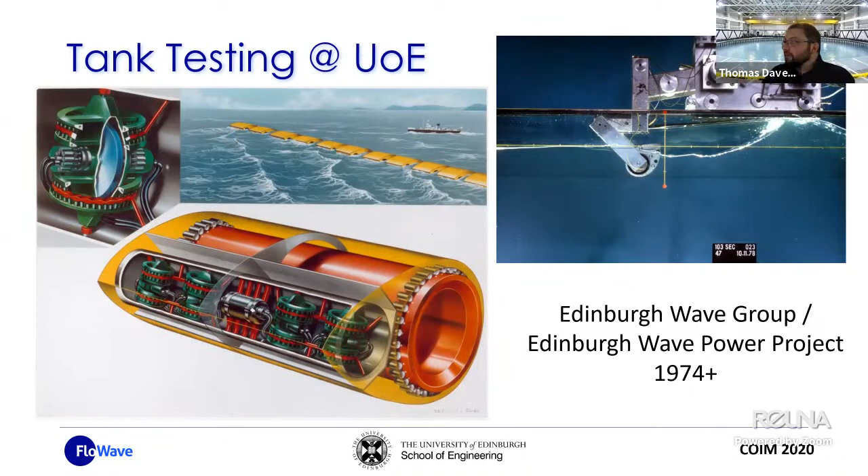But to step back even further, let's go back 40 years. This work really comes from the work that was conducted starting in around 1973, 1974 at the University of Edinburgh, by a group called the Edinburgh Wave Power Project, which was developing very large-scale wave energy devices. And this is still relevant to this day because although this device never came to commercial fruition, the technology that went alongside it fed into the development of very sophisticated wave tanks. And that's really where we come from. So you can tell that the photo on the left here goes back some time. I think this was early to mid 1980s. And this is the Edinburgh Wide Tank. So this was the first big wave tank in the University of Edinburgh.

And there was a lot of very important research conducted in this tank because it was very good at developing multi-directional sea states, so very complicated sea states. And they were testing scale models of their wave energy design concepts. The process has changed now because we don't really develop the technology ourselves. We develop the testing techniques and we develop supporting technologies. And instead of developing devices, the university and also a company called Edinburgh Designs Limited, who have connections to the university going back many years, now develop very sophisticated wave tanks.

So on the right here, you will see what is called the Edinburgh Curved Tank. And what you're seeing here is first generation and second generation. And this is a much smaller facility. The wide tank no longer exists, but this smaller facility was really exploring the concept of how you can use curved tanks and even circular tanks to basically give you much more control over wave direction.

And that takes us to where we are now, which is FloWave. So that's a fully circular wave and current tank. And to explain this in a bit more detail,

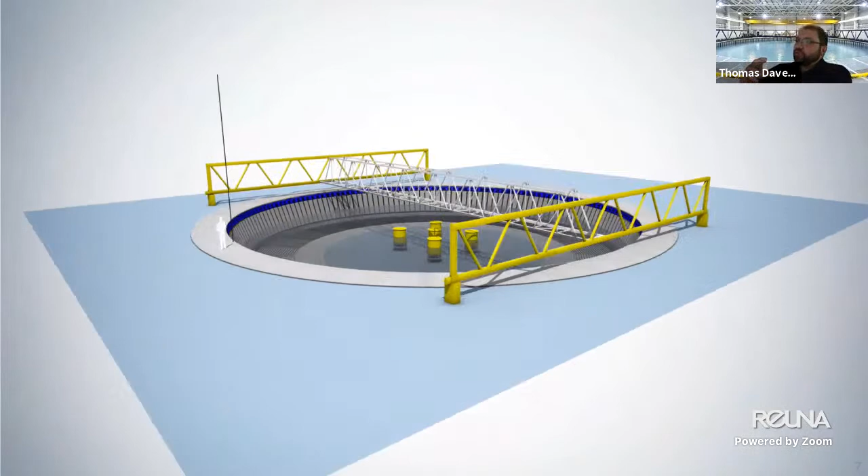But this animation is quite useful because it shows a lot of the elements which are now hidden within the tank. So if I can get a pointer. So what you have is, obviously it's a circular tank. You have these wave makers around the edge. And what it allows us to do is generate a wave from any direction. So the wave makers are the flaps. These flaps are moving. They're generating a wave. The wave travels across the tank.

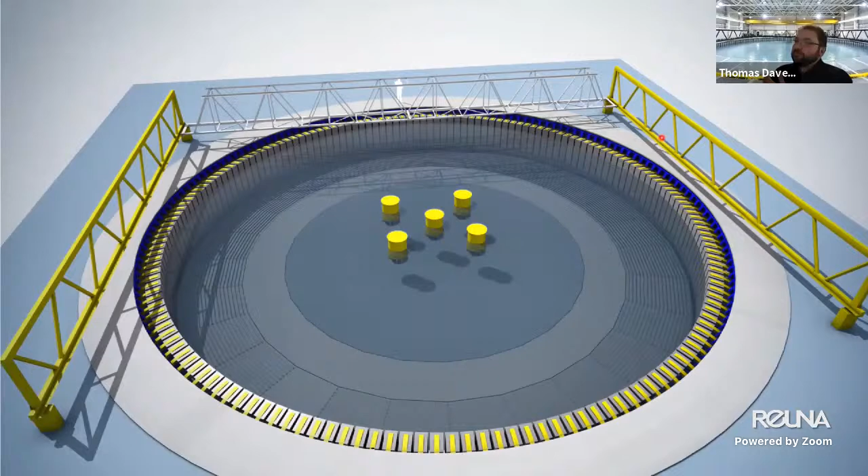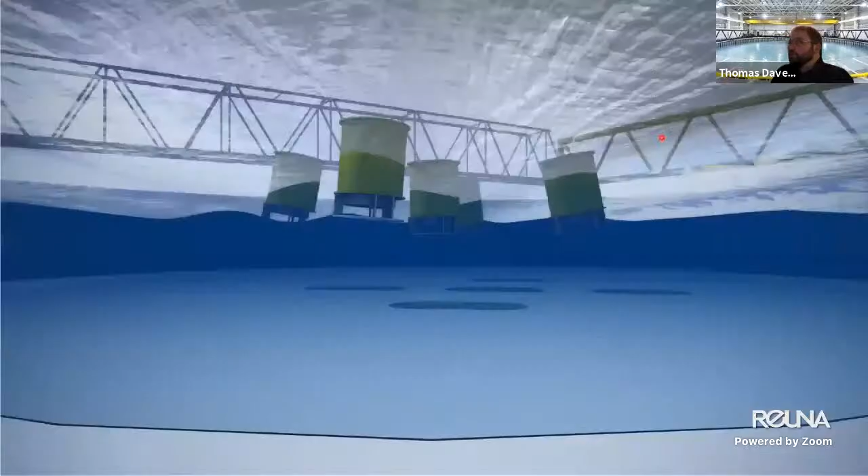But they are wave energy devices. I'm just going to get rid of this spotlight, so I think it's slowing down the video.

Okay. And importantly, we can also generate current in the tank. So wave current, and this is where the unique design of the tank becomes very important. So this is the only large circular wave and current tank in the world. So the current travels underneath the floor, so you have this recirculating effect. So you've got this bank of propellers underneath the floor, and they're arranged in a circle.

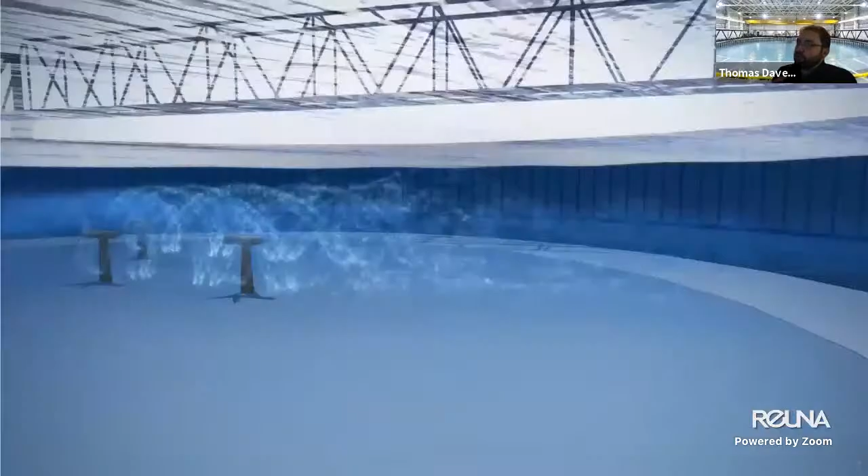So we have a circular arrangement of propellers and a circular arrangement of wave makers, and by combining them, we can generate the waves independently from the current. So we have independent control of the wave and current direction. And this is really important, first of all, for wave directionality purposes. So I'll just try getting that pointer.

And by being a circular tank, it gives us the ability to not have any restriction on modeling seas like this. So we can add wave energy coming from those different directions. And in a similar way, without getting too much into the detail, we can do the same with current direction. So you can do a lot of work with current just by having a tank which can generate that flow in two different directions. But what we can do in FloWave is start to have angled flow.

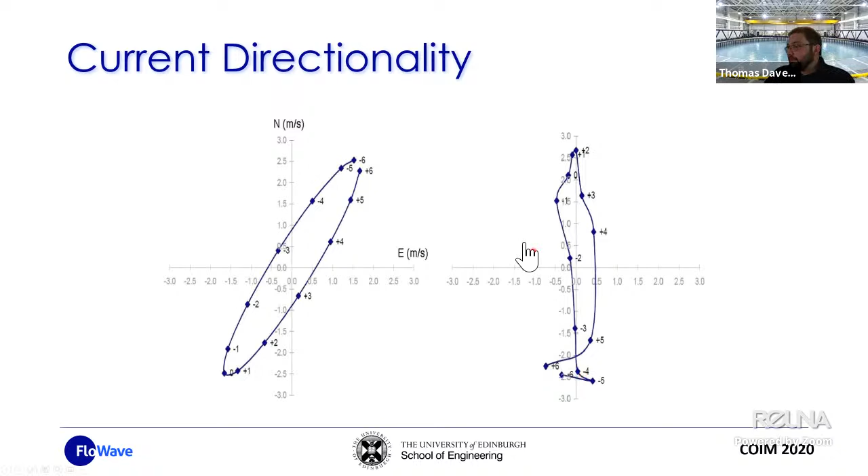And this becomes important. I don't know what the resource is like in your local areas for everyone watching, but in Scotland, we have a very fast site called the Pentland Firth, which sits between the Scottish mainland and the island of Orkney. We get very fast current velocities in here, and you can get very complex directional behavior in these sites. So, what does that look like in reality?

So the tank operating. Roman and I were joking about this earlier because the tank is very tidy. This was a video taken a long time ago.

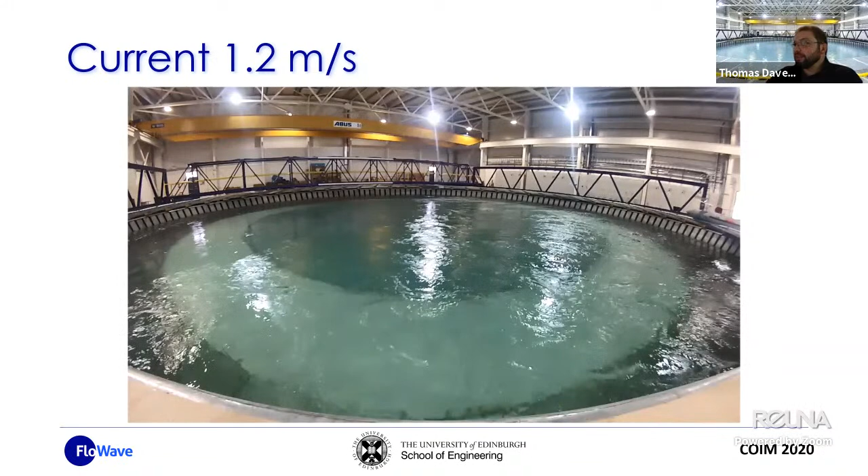Here we see the current at 1.2 meters per second. Doesn't look that fast in the video, but this is actually a very fast current velocity for a big basin like this. If you want to scale it up, this would be about 5 meters per second for a full-scale site, which represents something like the Pentland Firth, which typically is about 4 meters per second. So it's got plenty of overhead for doing very fast velocities. And then things become exciting when you put the two together.

And this is quite a dramatic example because we're dealing with quite fast current speed. But even quite low current speeds can cause quite a dramatic change in the wave behavior. And that can be very important when you're trying to feed in the conditions from a real site.

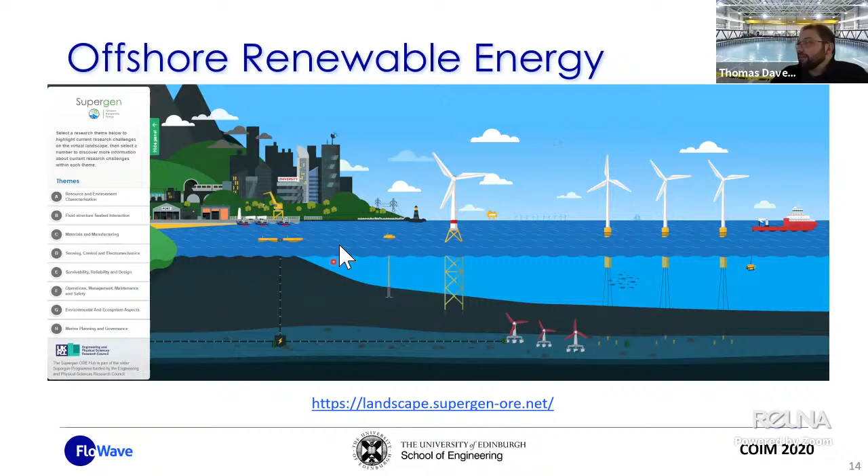And just to very quickly say, to put this in context, we can go all the way from very conceptual designs into much bigger laboratories, which is what we are. So we usually start in our small tanks with the conceptual designs, move into something like FloWave, where we start to look into more complex behavior. How does the generation system work? How do you control the device? How do you get into all the detailed design?

And then finally, we sort of leave the lab and go into small scale deployment, but you're still involved at that stage. You might still be doing some element of tank testing, and then it leaves the lab and it goes into large scale deployment at sea, and then finally the commercial device.

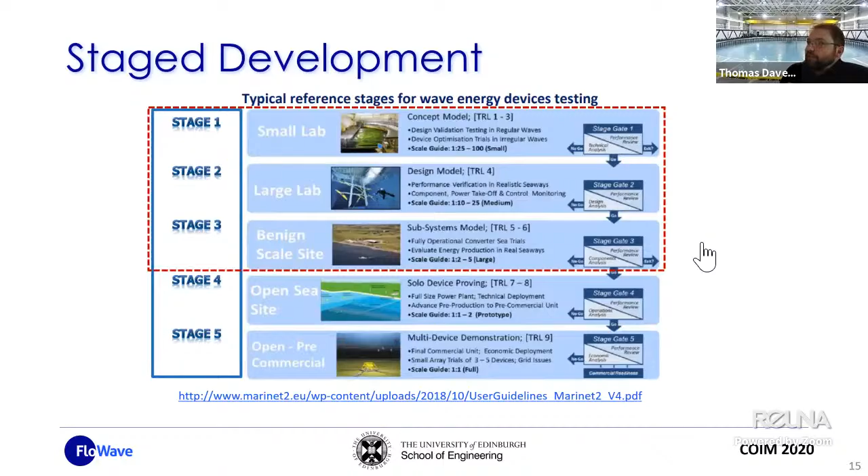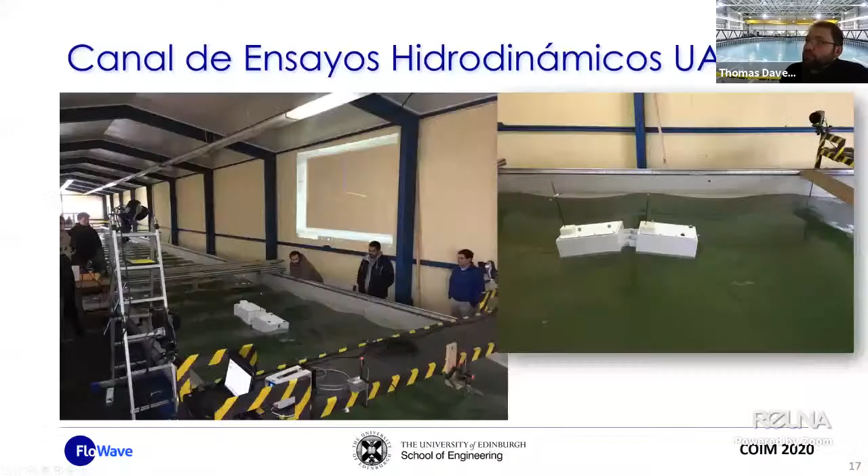Potentially giving you a lot of advantage in that you remove a lot of hydraulics and perhaps components which are less reliable from your design. A very conceptual design, I thought I'd put it in. I had the pleasure of visiting the test tank in Valdivia last year, and here we have a really good element of the kind of thing we'd measure at a concept stage.

So the lab built a very generic flap type device for our tests. And what you're measuring here is you're not worried about things like the generator performance. You're interested in measuring the hydrodynamics. So one of the main things we're measuring here is the movement. And what you'll see is the cameras around the edge. These are motion capture cameras. I think Roman's experiments show a bit more of this later.

And we have these markers at the top. And then when we play that back, we can then isolate the movements of the device. So we're actually measuring the movement of the device, and that's very useful when you're going then to feed that into something like a numerical model.

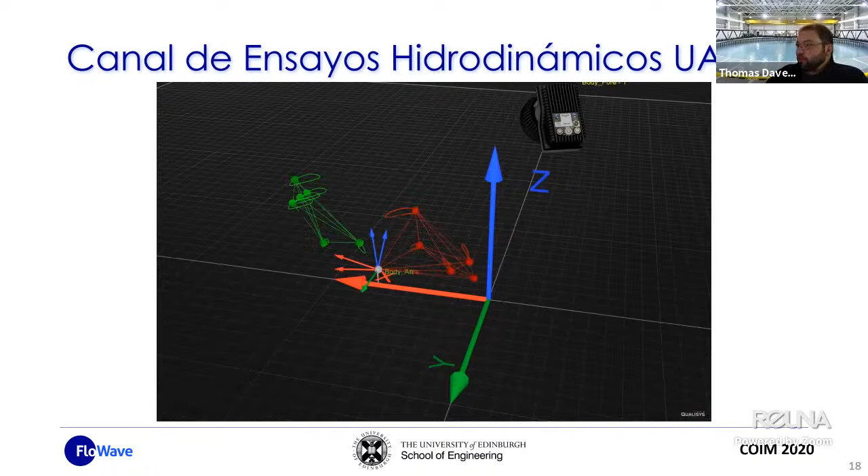So to flip back to Scotland, we have exactly the same technology within the FloWave test tank. And here we see these measurements overlaid over the top of a model. This is a company called Anaconda who came to test with us under our Wave Energy Scotland scheme, which is a government scheme. And what we have is we're measuring the movement of this element here.

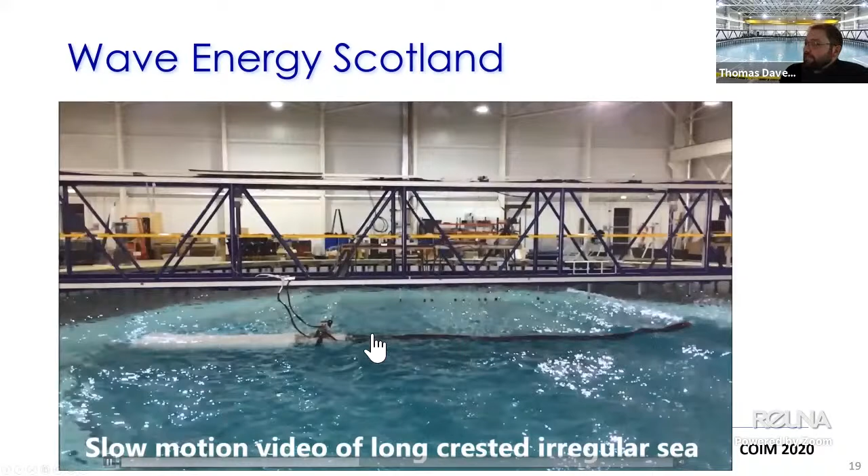What's important about this is getting to a stage where we're starting to measure not just the movements, but we're measuring the power output as well. So this device works by generating pressure waves in a rubber tube. And those pressure waves are then used to drive a generator, which is located here. Sorry, you can't see my pointer, but it's located in this sort of main section with the cables running to it.

And then just to switch to tidal energy, this is a very fast run through, I know, but I thought this was quite a nice example. This was one of our first tests, I think, in 2014. One of the challenges with tidal energy is actually mounting the rotors, mounting the generators on the seabed. So this company is an Edinburgh-based company called QED Naval, and they came to us with a design which essentially is a foundation structure which generates downforce and allows the device to be fitted on the seabed.

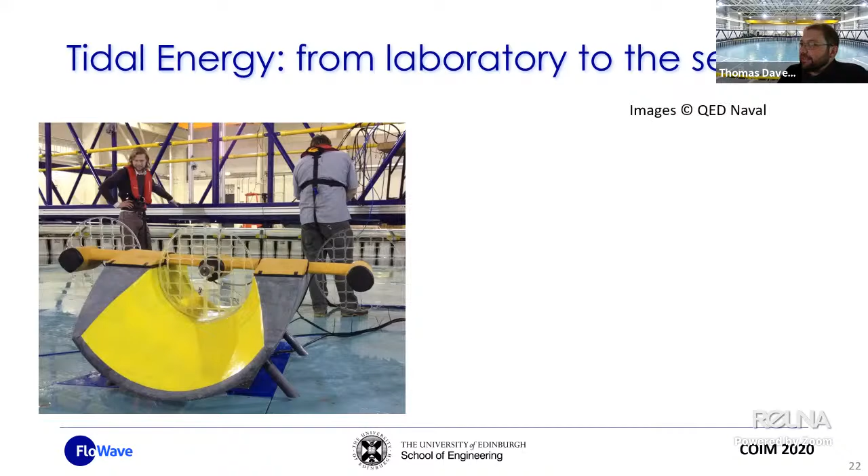And the nice thing here is it's showing the stages of development really nicely, because in these early stages, they're not so interested in the power generation, they're interested in the general performance. So instead of having lots of complex hydrodynamically modeled rotor blades, it has these discs which generate drag, but it allows them to concentrate on their main bit of work, which is the actual structure. And then that goes from the tank into small scale tests in the sea. And finally, recently, they've got that in full scale in the sea. So there you see that sort of 5-year journey from the concept stage to something full scale and real.

The other side of the tidal energy work is maybe a bit more academic. So these generators you see in this picture were actually constructed in-house by a researcher called Dr. Gregory Payne. He designed these devices to measure loads on the individual turbine blades. So they're very clever in that they're not designed to be a model of a particular commercial design. There's a lot of learning that can be done here, which can then feed out into the industry. And this is very typical of the work we do in the university, because we're not generating commercial intellectual property. We're usually generating knowledge which the whole industry can use.

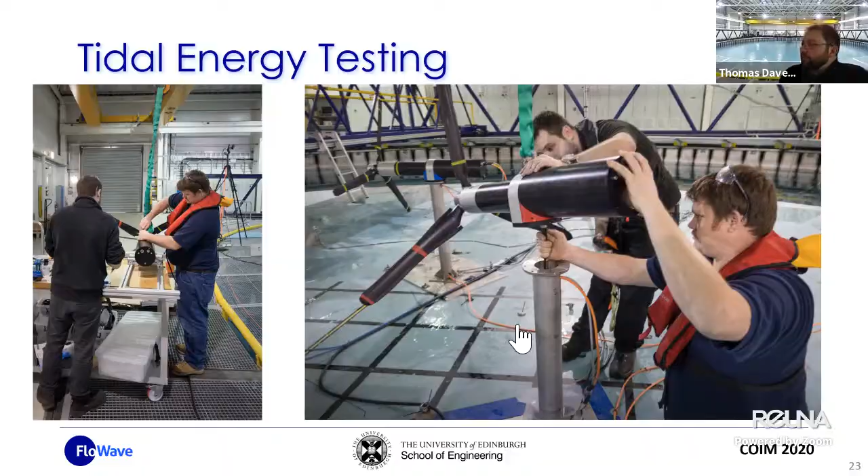And to give an idea of how these are operating, the nice thing about this design is you can deploy multiples at a time. And in this case, we're interested in how the middle turbine generates, because the middle turbine is getting an accelerated flow from the two outer turbines. And in this test as well, we've got the waves going over the top. Because tidal energy devices are usually in quite shallow water, the blades are quite prone to wave loading effects. They're only maybe 10 meters beneath the surface, if that. So what we can do here is actually measure the force on individual blades, and understand what kind of loads that's putting into the system.

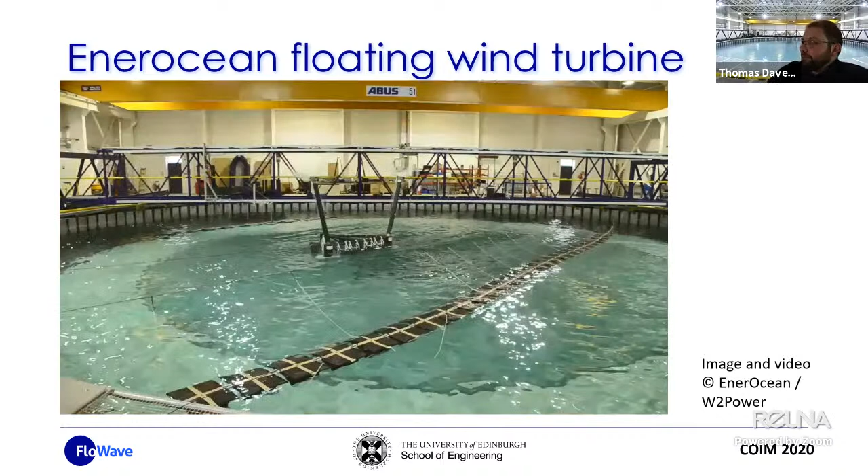The nice thing about this is this now exists in the sea as well. Not yet at full scale. I think it's 1:6 scale at the moment. So again, we've seen a nice journey there over a period of about 5 years, and we still work with that company. So hopefully they continue to be successful.

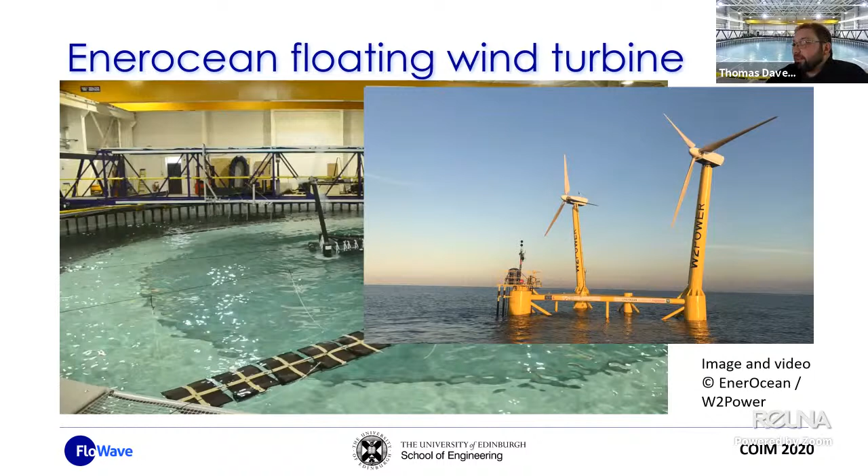So an obvious one is that the physical simulation connects to the numerical simulation, and you use the results from the physical simulation to validate and improve that numerical simulation. But what we're very interested in at the university is moving from measurement data. So we go all the way from what happens in the field, what do we actually measure in the sea, looking at hydrodynamic models, not of the devices, hydrodynamic models of the resource. So for example, a hydrodynamic model of the Pentland Firth in Scotland.

And from that, we decide what do we need to characterize that. So what we're using to describe that site, that includes wave, current, but importantly for us, what happens when the two are combined. And finally, turning that into a reasonable number of parameters, which we can then feed into our physical simulation.

And the measurement from the field, which I'll only touch upon, a lot of this work is done by my colleague Brian Sellar, is a combination of measurements taken from a tidal turbine, for example. We've got beams measuring both the current and the wave field. And then from there, we get very large data sets. And so the interesting process is how we go from these very large data sets, either from those measurement devices or wave buoys, for example, which are floating on the surface, how we then process that in a sensible way.

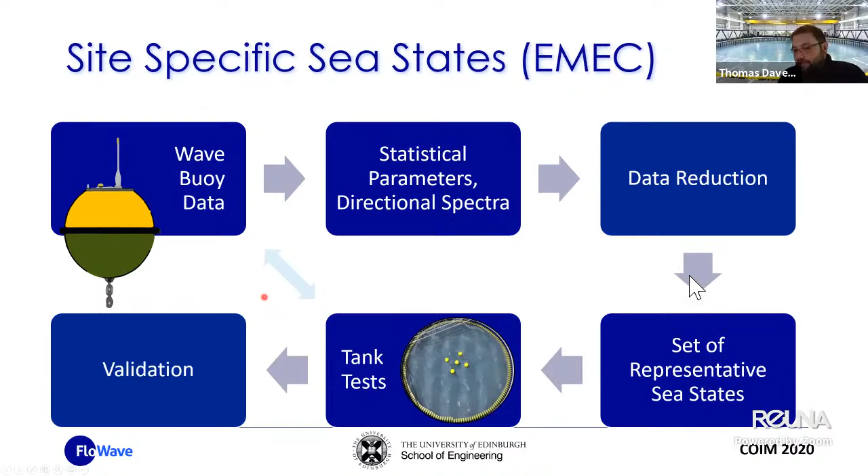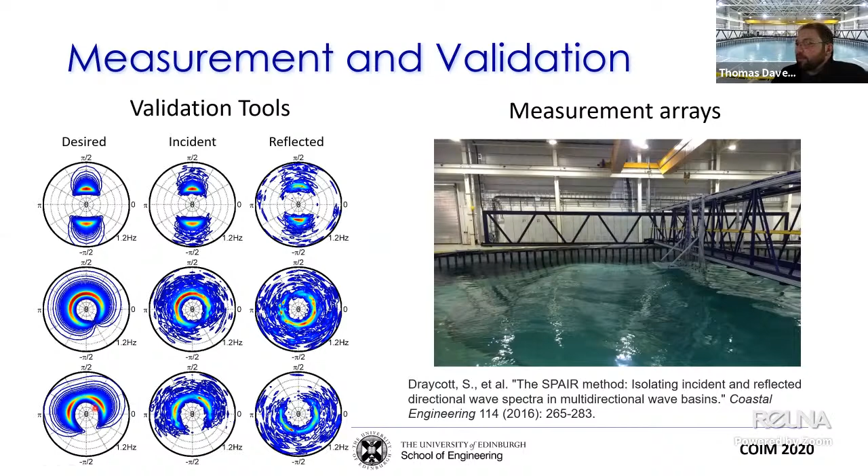So there's quite a lot of interest in crossing seas because when we get that focusing effect, it could be one of the influences behind freak wave generation. And Sam in our institute collaborated with the University of Oxford to do a very interesting paper where they looked at how freak waves are generated by crossing waves, which is very nice science, but also got us into the newspapers because it turned out it looked very much like the famous Great Wave. So we got lots of coverage in local papers.

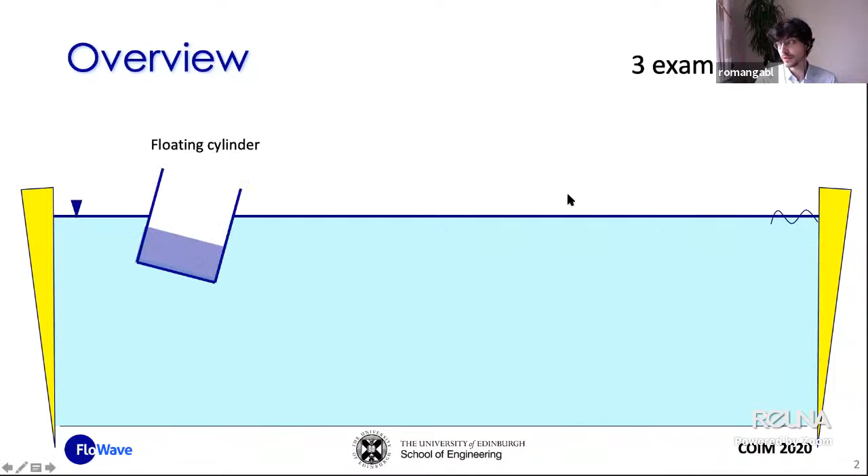I will go through three short examples. Tom covered a lot of different tests we have done, but I want to dig into three in more detail. The first one will be the example of a floating cylinder in the wave tank. Then I go back to the floating wind turbine, which will be a little bit deeper into the tank. And then we dive fully into the tank down there with an ROV.

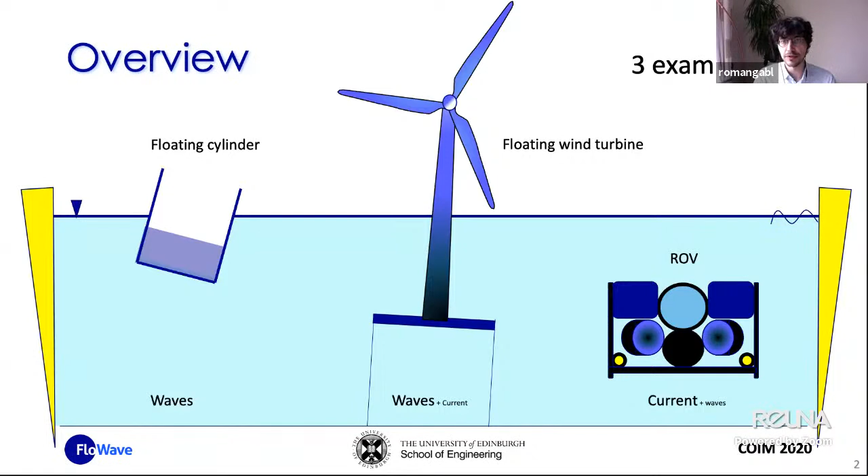What is it about? The floating cylinder will have only waves. The floating wind turbine will have waves, but also a little bit of current. And obviously for the ROV, the more critical things are about the current. So we go from top to deep into the tank, and from waves to mainly current over the next approximately a little bit less than an hour. So start with the floating cylinder. Why a floating cylinder? Why do we need this?

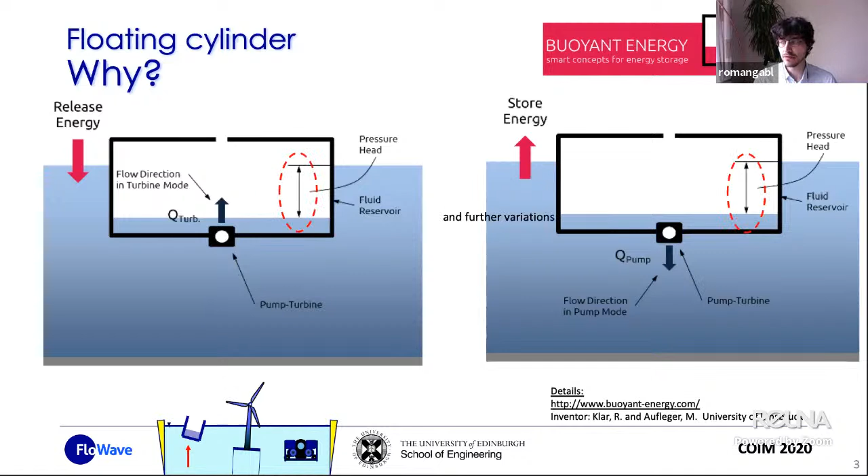There is an energy storage concept invented by my colleagues from Innsbruck in Austria. It's the buoyant energy concept. It's a hydropower plant for the ocean. You can have a big floating device which is filled with water, and when you want to store energy, you pump the water out of this device, and if you want to release the energy, you let it flow back into it.

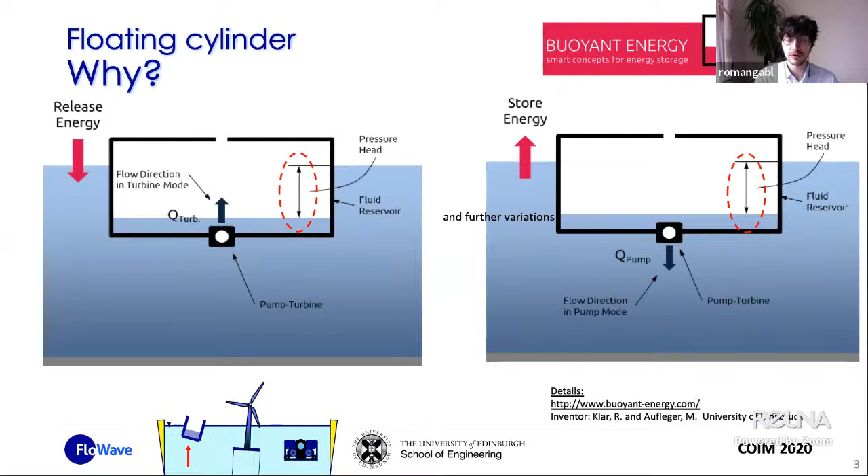And the nice thing about this concept is that no matter in which state the big battery is charged, it will always have the same pressure head from the outside to the inside water level, which is absolutely crucial to have optimum conditions for pumps and turbines. So you can bring the best from a big hydropower plant, which runs at optimum height, close to the floating offshore wind turbine to store their energy.

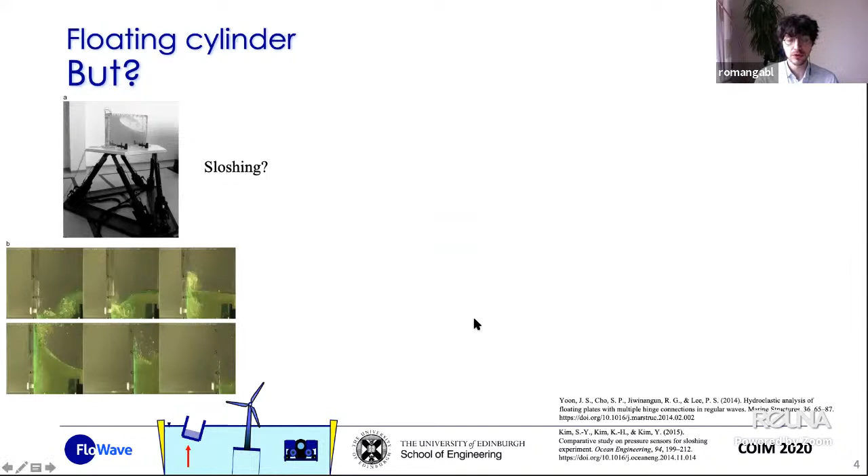But you think, okay, it's a big structure filled with water, sloshing. Yes, sloshing is the main topic. And when you think about sloshing, you find tons of papers out there, from a hexapod, really sophisticated, up to 2D, quite simple solutions, and also for large structures. There's a lot of literature about this, but if you merge it, the literature is not so wide, but yeah, obviously ships.

So big tanker ships with LNG have big tanks in them, and they're floating around, and they have interaction of inside sloshing and a big structure. And when you look at the design of those devices, you see that they combine CFD, scale model tests, and the sloshing.

But the problem is there are a lot of input values. Just imagine a hull form of a ship. It's really complex, and the geometry is quite hard to generalize. So there are more specific solutions out there. And the filling levels are really different, and you have far more complexity in the different arrangements. And overall, quite a strong optimization process is needed to integrate everything together.

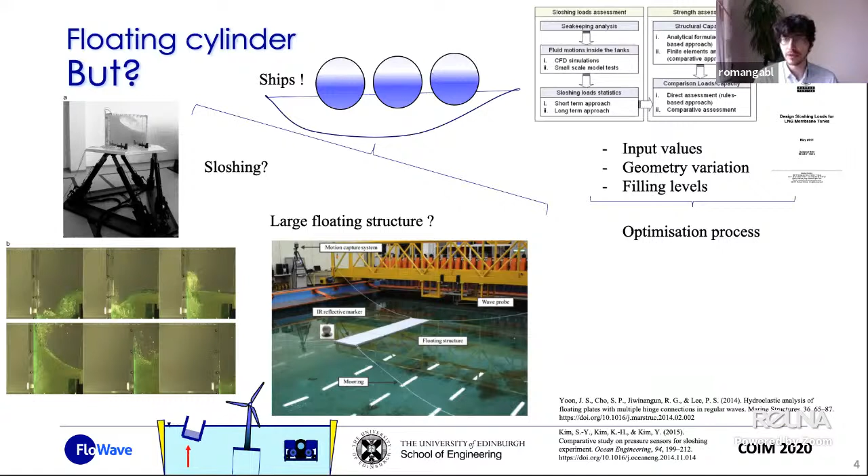State of the art is that you use this integration, but you normally do it in iterations. So you decouple the sloshing element and the ship motion element. For both there are quite good software solutions and modeling approaches available, but they focus more on the pressure on the wall inside these tanks, because this is the critical one. In a ship it can have a slight influence on the control of the ship, but the main issue of all these investigations is the pressure in the tanks, which is critical because you have to design how thick the walls of the tank should be.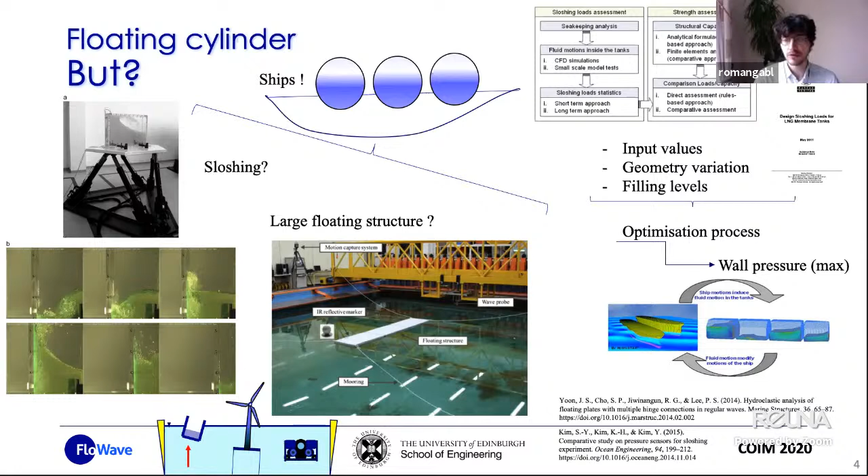So from a very, very complex thing, we thought, okay, the floating storage will not move normally. It should stay in the same location, but it also has wave loads. Do we really need this highly sophisticated, very complex process, or can we reduce it? And to have a good comparison, we decided we want to make a benchmark test. The benchmark test is to reduce the complexity and see what we really need for a numerical tool to optimize it for the floating structure.

The simplest one is just to have an outside water level, an inside water level with a reaction, and in between there's a structure. That's just an L form, but if you think about 3D, the simplest way to do this is a cylinder. And you observe the motion of this body floating in there in all 6 degrees of freedom. With this data set, you can have a good benchmark test for your numerical model.

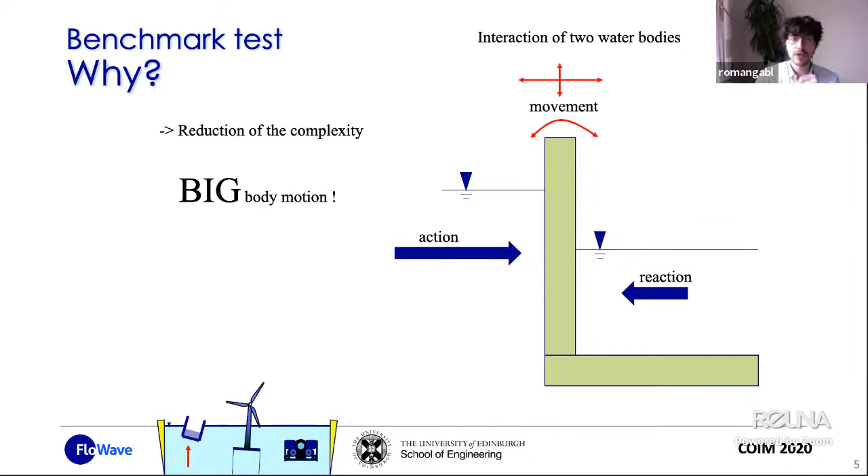And what we absolutely wanted from the beginning was not to have only small motions where you can stay in the frequency domain, because there is some literature around saying the influence of the sloshing is not so critical. We wanted to see real big motion. So we wanted to have a challenging benchmark test.

And why is it challenging? With moving walls in numerics you always have a lot of options, but you either have to adapt your mesh to the new geometry every time step, or you have to adapt the geometry. Some software solutions use a fixed numerical grid and adapt the geometry onto the grid, or you use a completely different system; SPH would be an option. So there are solutions out there, but the question was, how good are you at solving such a complex, or simple, problem here?

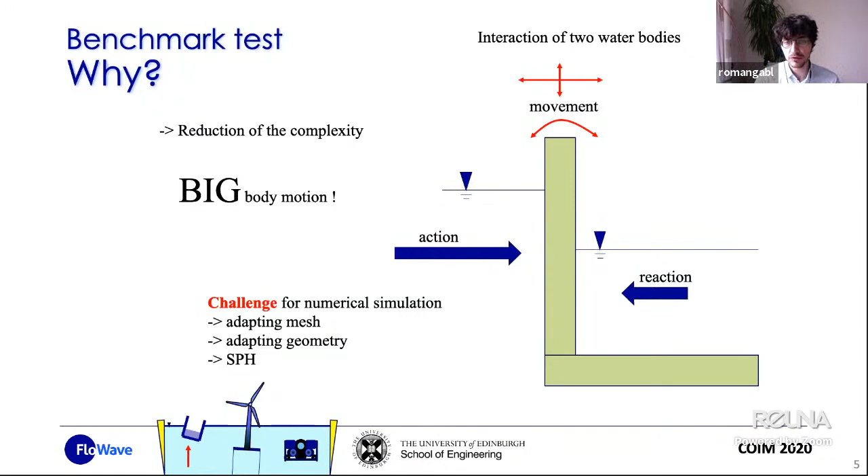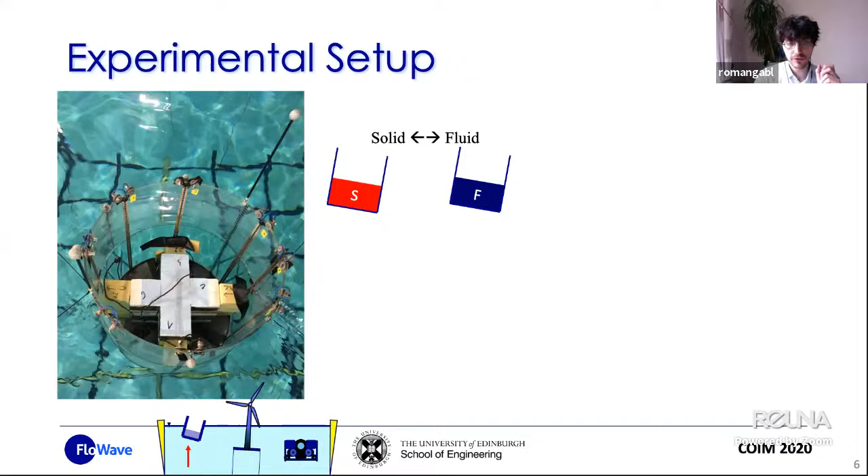So we decided to design an experiment, and we decided to compare solid and fluid ballast options. On the left side, you see the cylinder filled with a solid ballast, with the same density over the height like a water filling, which you can see on the right side. The cylinder is 0.5 meter wide and 0.5 meter high, on the raised floor, and floating in there. In the next slides, S marks the solid solution and F, the blue one, marks the fluid ballast option. We investigated 4 different drafts to get a good overview of their influences.

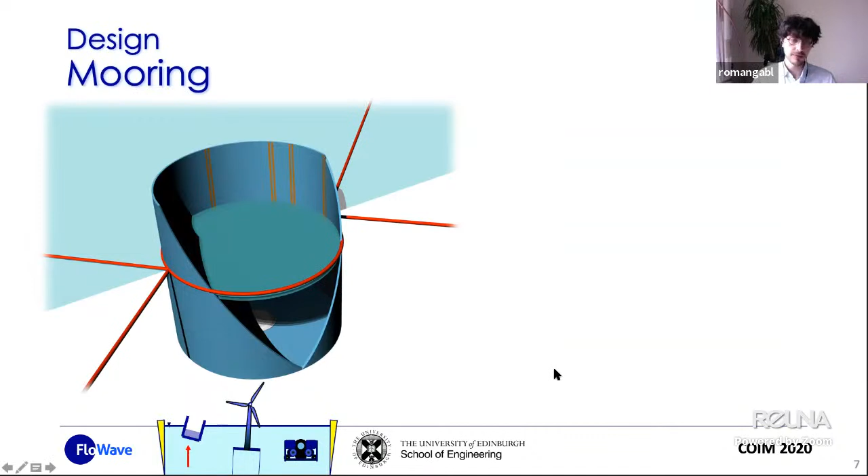We spent a lot of time thinking about the mooring system. It's quite critical in the tank that you have a good mooring system. We decided to use a very soft one, because we want a high degree of freedom of the motion of the cylinder. In theory, you could just fix it in there and run all the waves against it, and nothing would happen.

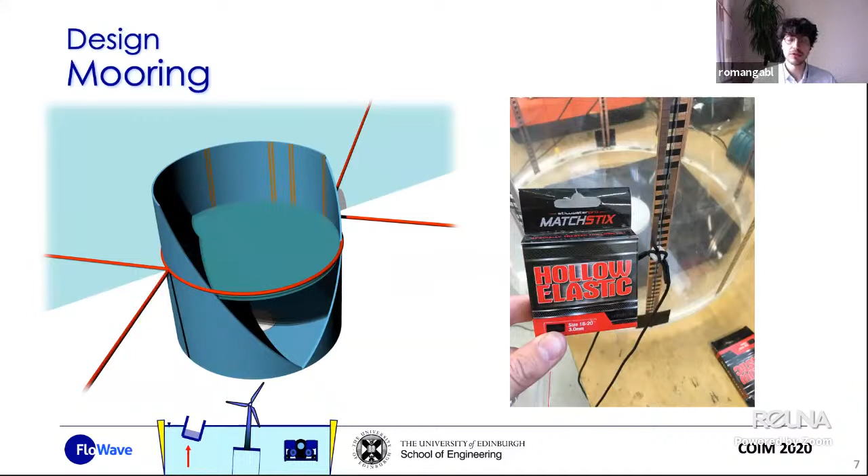So we wanted to have a really soft one, and we chose 4 mooring lines which join together in one point. So you have a lower resistance of the mooring around the pitch. So when the wave comes, the model or the cylinder moves really easily in this direction, and in roll a little bit less, and in yaw and surge it is a little bit more strongly limited.

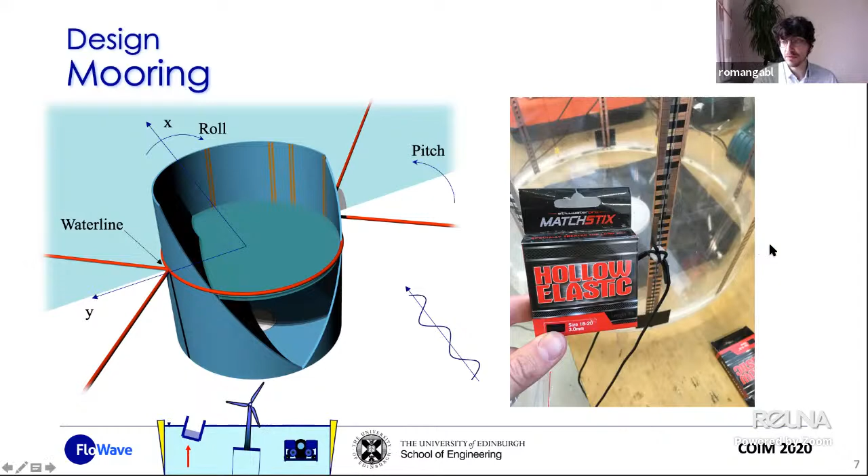We used hollow elastic, which is quite fantastic. We started with this model, and we reused this elastic fly fishing device supply for a lot of other mooring systems. So maybe keep this in mind whenever you have to design one. They are really good.

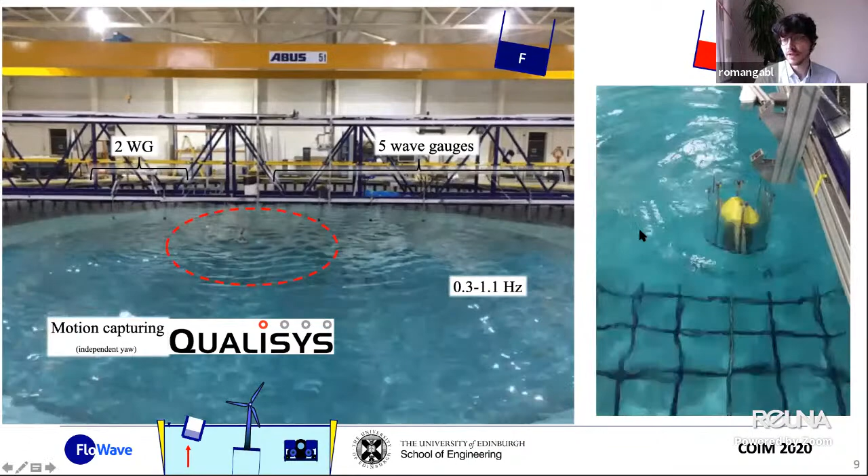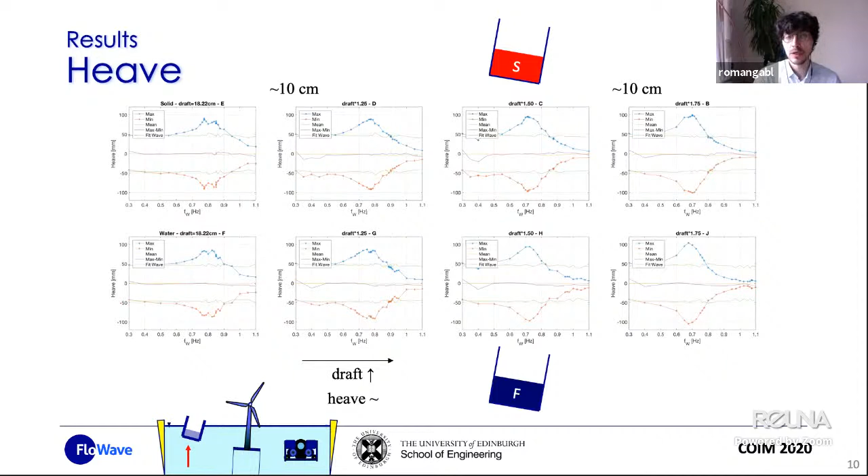And as Tom previously mentioned, we used the optical motion capture system. On the right side, you see these markers moving around, and we capture these markers and detect the motion. Just a quick insight into the examples. I won't go into surge and sway, but only the heave. We have these 4 different drafts in 2 different versions. The top one will always be the solid one, and the bottom one always the fluid one. We have a wave amplitude of 5 centimeters and a heave of up to 10 centimeters. So a RAO of 2, the motion is doubled.

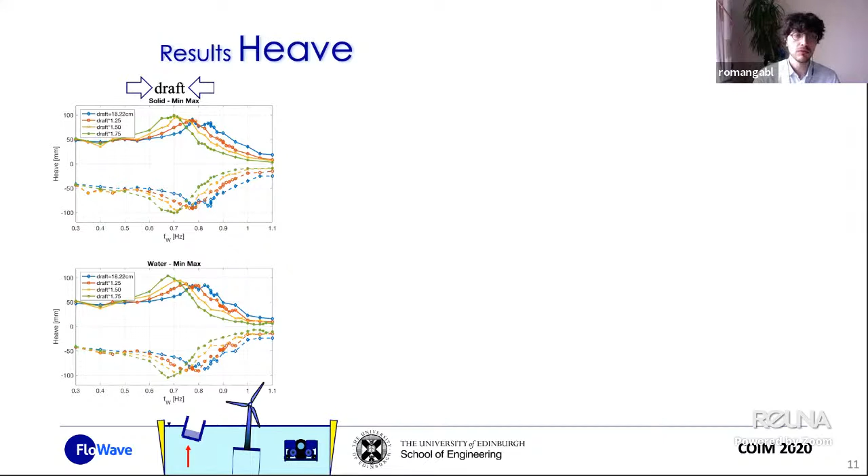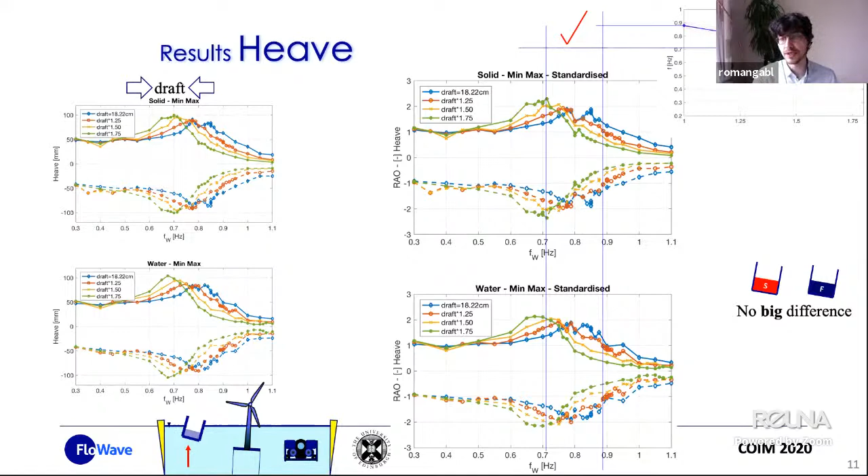And we put all the results, all the 4 drafts, into one or 2 pictures and standardized it. Here you see the RAO, which quite obviously comes up to 2 for both cases. And when you compare with the natural frequency of the mooring lines, you can see, deeper down, 1.7, we have a lower response frequency, and the peak is lower, at 0.7, and the upper one is 0.9. So it's clearly defined by the mooring system how this reacts. But the key thing is there is no big difference in heave for solid and fluid. It would be boring if this is all the same.

So we get into the pitch, that's the rotation. When you look into the waves, it goes front and backwards, which is the main part. And we were really happy with our setup. We got up to over 20 degrees. So the pitch was really good. We had big motions. That's what we wanted. But if you look at the small lower draft with the fluid filled one, you see that there's something strange going on.

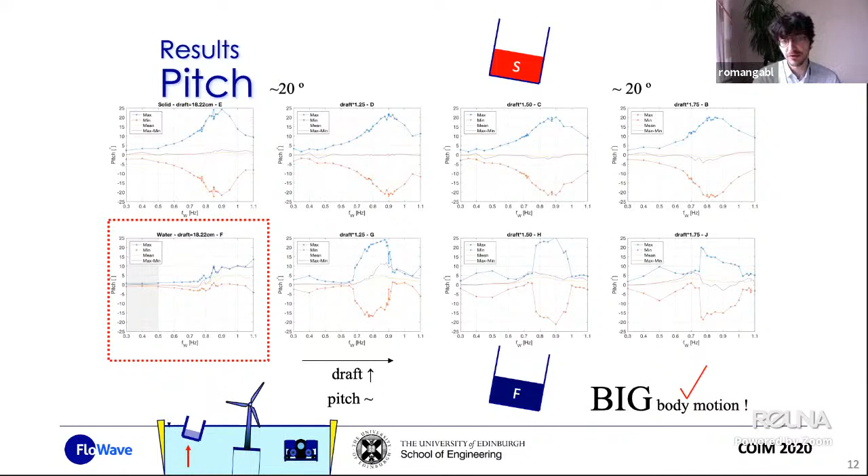And that was because when the fluid was the lower version of them with the water ballast, the model just hung into the wave and didn't move really far, really quick. So this was a strong dampening, and we were a little bit frightened that it would be quite a boring experiment if we see nothing.

But when you look at the comparison again, you see that the solid and the fluid one were both quite good; when you go to the higher drafts, you see a higher response. Again, compared with the natural frequency, you see that the pitch in all different load drafts was quite the same, and you see this grouping of the results on top in the pitch.

But when you look at the fluid ballast option, you see that these resonances of the natural frequency were quite low, 0.5, 0.4, 0.5. And you see again these responses down here, which we didn't investigate in detail because we were more interested in the higher frequency bandwidth.

But you can see that, except with the smallest draft, everything else got the first peak here, and in addition a really nice second peak at the top. So you see at double the natural frequency a big response. And also, it's not so clear as the top one, but it's quite interesting because there is something going on in this violet part here, which I marked on the top. Just keep this in mind for the next slides. There is something strange going on, because the response goes up and falls down quite heavily.

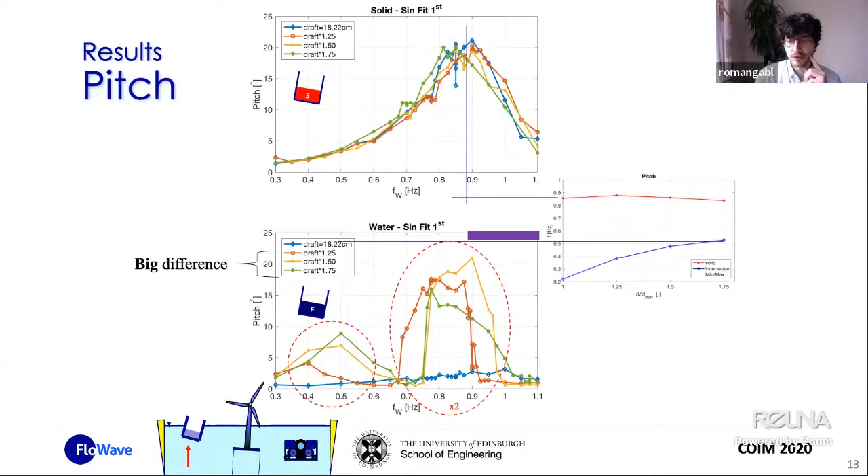So there is something going on which is interesting. We can identify a really big difference between solid and fluid for this higher frequency bandwidth, and there is a roll going on. Not for the lowest version, which is the boring case, but all the other ones are really quite interesting. And when you bring this together into one graph, you see the solid ones are quite boring again, with small angles and small responses, but the fluid ones have these nice peaks again in the higher frequency range with roll.

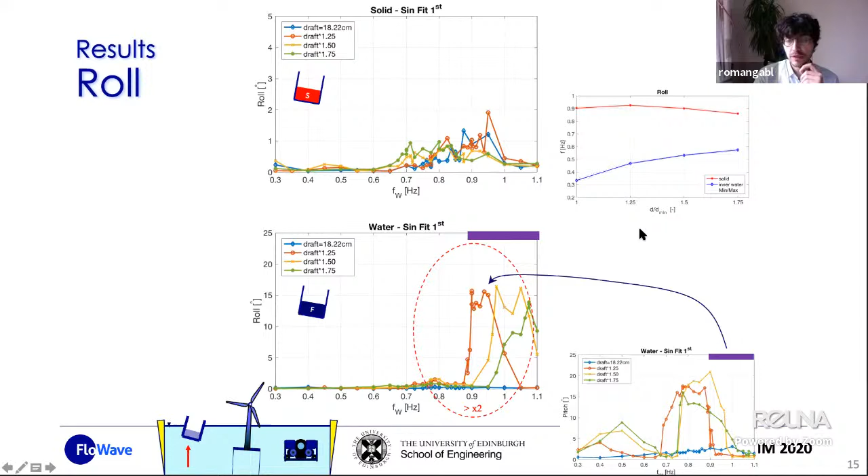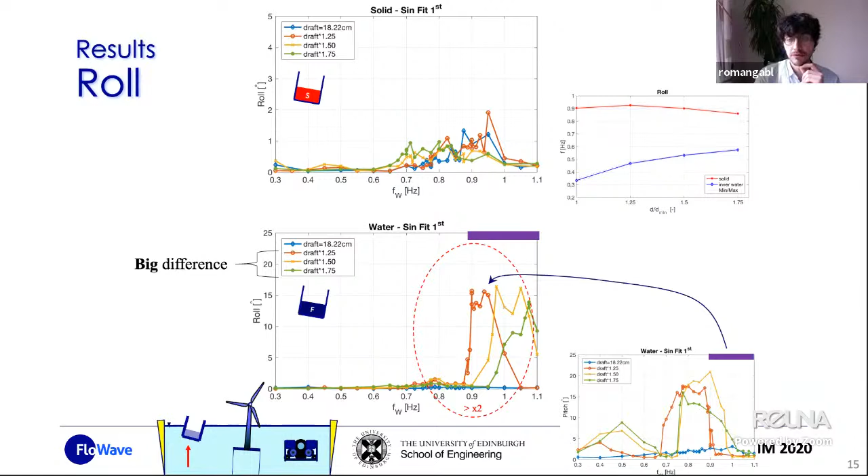And when you compare this again to the natural frequency of the roll motion, exactly where the pitch goes down, shown in the small picture on the right for the water ballast, the roll starts. So in the water version, there is a shift from pitch into roll. We investigated this further and saw that it's really parametric rolling, that it's sustained, that it remains for all the cases, and that it's not artificially introduced.

We published these results, or previous results of the cylinder, in two papers. The first paper looks at the wave gauges included in the cylinder to measure the water level. And we adapted the motion capturing system to measure the water inside the cylinder by using floating balls, which will be done in the future for the real tank experiment. The results I showed you are now analyzed and published, and you can access them and use them as a validation experiment.

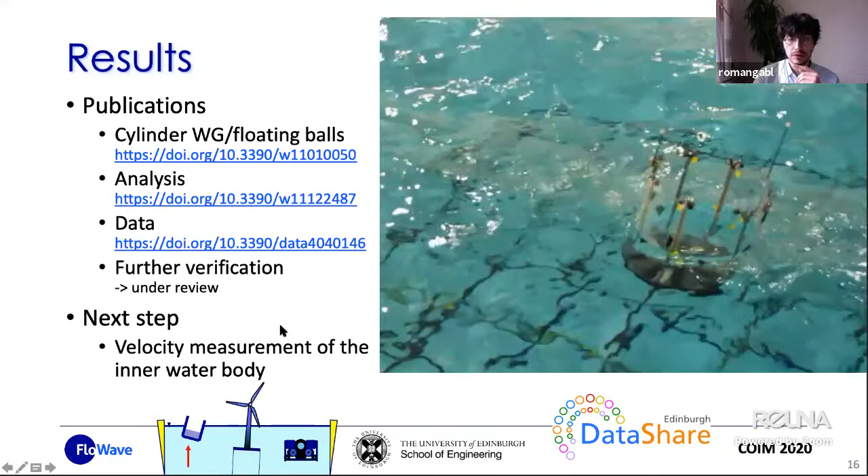The mooring which we use here is more restraining it, not provoking it. And the next step is obvious, where we'll try to measure the velocity in the inside of the sloshing, so that we can provide also velocity data to understand the sloshing inside far better, and how it generates this motion.

Okay, so coming from a really basic research part to a more applied one. Tom previously mentioned it. We have more and more floating wind turbines to investigate in our facility. And the question is always, why do we do this? Can't we do this with the numerics? And I say, yes, you can do a lot with the numerics, but you also need validation. We do a lot of validation experiments to validate the numerical results.

That's typically done with the final tests at the final geometry or close to the final design, because FloWave is not a cheap facility, so you don't do it just to have a first glance. You come to us with your final design, and then we test it and hopefully show that it works fine.

In general, with a floating wind turbine, you have the problem that you have to combine two different worlds, the wind and the water. And in the scale model, you have to use different scaling laws for this. So in the wind, you have to Reynolds scale it, so you have to have the same Reynolds numbers in the numerical and in the experimental case as in nature. And in water, you have the same Froude number.

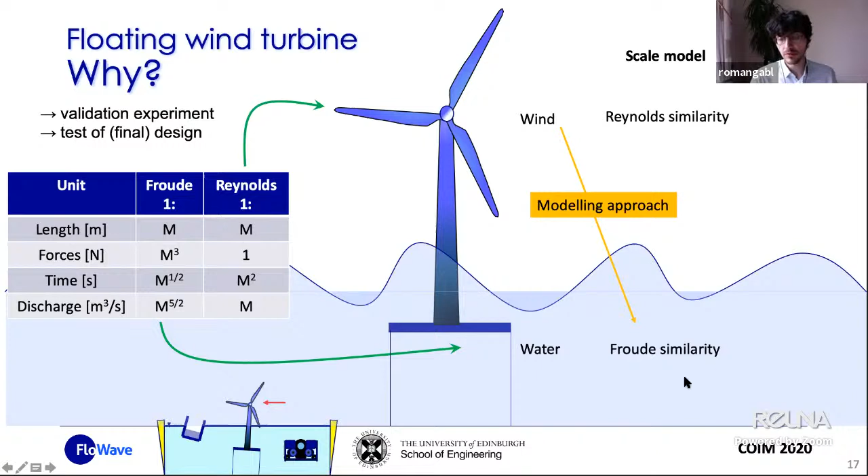You could do both, but if you have both, then it's getting really, really complicated, because the wind generates different waves. So mainly, when you look at the hydrodynamic performance, you simulate the wind load in a simplification. And how do we do this, and what do we do therefore? You have, for example, three blades, which is quite common.

Oh, before I go to this, I just wanted to say why I don't talk about all the things underwater. The things which are underwater are brought in from our clients. You saw some examples Tom presented, but in this case, it's a company called Axis Energy Projects, which developed this special device in here.

And I don't want to touch on this, but if you want to have a look at how it works, it's quite sophisticated. You can have a look at the homepage, and there's also a YouTube video about our testing campaign, which is more focused on what they wanted to present. And so I want to limit it to things which we contribute to this model.

So, okay, back. We have three blades, and each blade has a load, and it's distributed over each blade, and you can summarize this in one point, at a third of the blade length, and you have three of them. And because the blades go together into the shaft, into the center and the axis, when you just sum all these three forces together, you get the center forces.

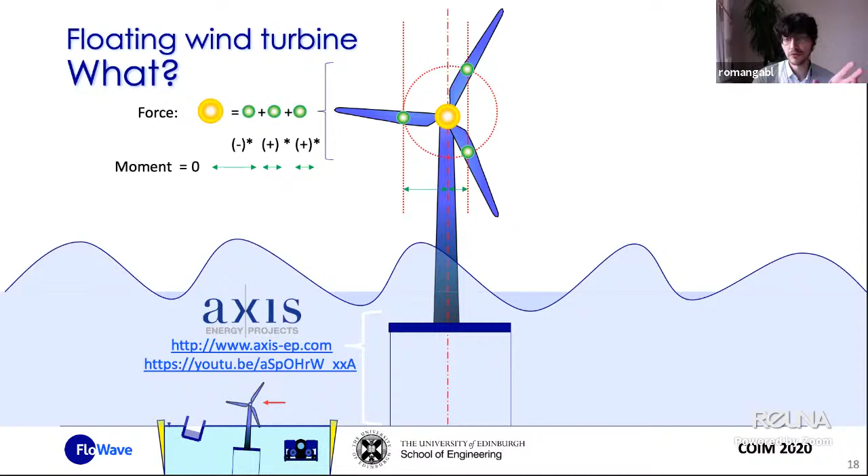Okay, that's quite straightforward. And when you look at the lever arms of each one, you can see that in every time step, everything is balanced. So for the system, the approach with three different forces would be absolutely similar to one big force in the center. That's for a perfect system. And normally, you have a perfect system and everything is fine, and you can run.

So with 1 point in the center, the force is similar to the 3 points on the blades. But yeah, we know that it's not always a perfect system. You will not always have a perfect system, especially with the floating wind turbines. They are getting more and more. At the moment they are talking about an exponential increase of different versions which come out.

There are different technologies installed in every part of the world, and if you get more and more of those, the chance that something happens is increasing. And therefore, you should also have a look at the imperfect systems. An imperfect system could be that 1 blade is not precisely manufactured, or it has a little bit of damage, or in the worst case, a blade is completely damaged and has an influence on this.

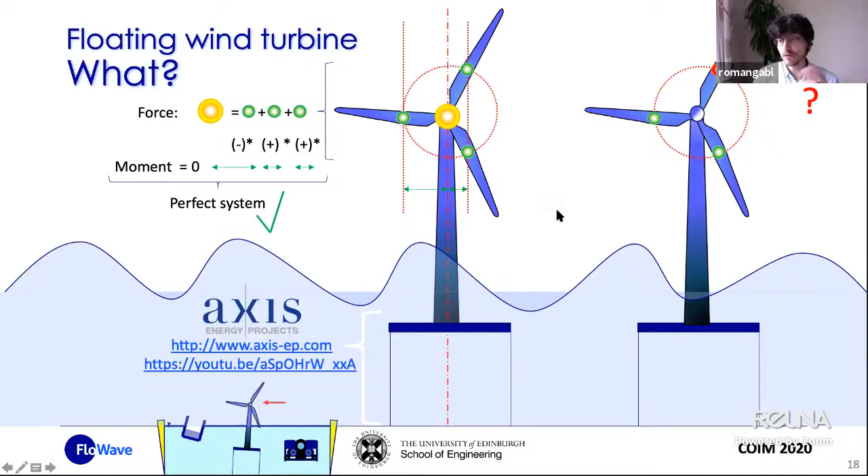And the idea is how to implement imperfect systems into the load bearing. How does the floating structure react to it? And in future, how does this device survive even a complete blade loss, or a problem in there, or will the complete system sink or fall over?

We had to build up a prototype, a very special one. You see here again the tank, and the two different options. We have the center one, which acts as one center force, or 3 different small forces. So we use either this one or the other one. And for the central force, we use the winch.

On the right side here, it looks quite fancy. It is quite fancy. Tom spent a lot of time designing it, and it worked really, really well. We were glad, and we think that's a really valuable device, and that's the gold standard for us. For the main client testing, we used this device. And we could really apply the forces we need into the center of the hub.

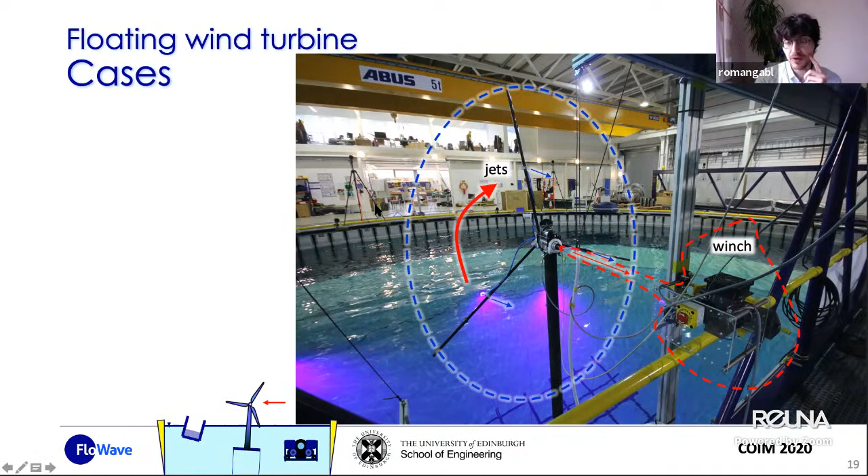And then this is the other new, novel, slightly crazy approach: we have spinning carbon fiber rods and 3 different jets of water. Water is pressed out of the jets and generates thrust, without the winch, obviously, just the jets. I have to stress even more, that's just a prototype.

We did this now, and we are looking forward to making this more resilient, more stable and more flexible, and to use this further. But it was just the first system which worked. What did we do? We ran the complete model. Currently it would be without everything, considering the wave, considering the wind. So we would only run waves and current and the winch.

So these were the first and the last one. This is the typical case which we run for the clients. And because these clients had a research project, they wanted to go into more detail on these imperfect loads. So we included rotating, where we just spin the rotor blades, the carbon fiber, with the winch inside, and rotating with jets, which is the new standard,

or the highly sophisticated one, where you push the model back with the water jets, and only the jets, and, as previously mentioned, only the winch. For all of these we measured the loads in the tethers down there. They have more tethers than normally used, but each one was equipped with a load cell and a motion capturing system.

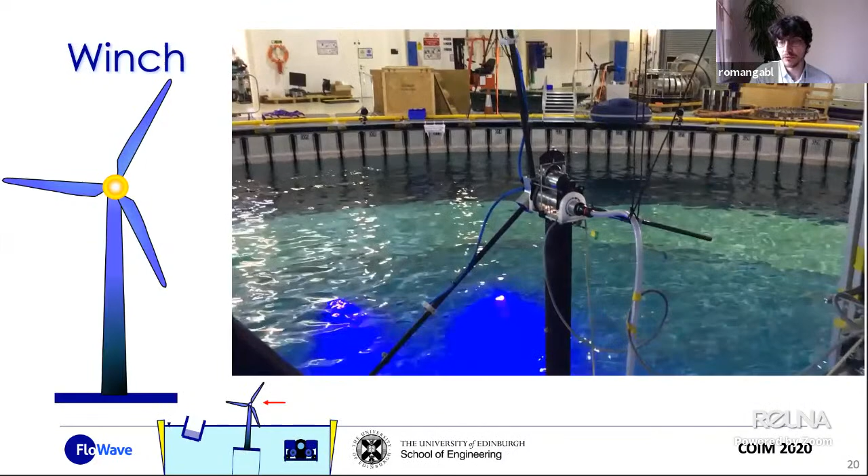I hope you can hear a little bit of the tank sound here, the winch working. Just a small case, an operational case. The winch pulls back the model here 5 to 10 centimeters and applies a constant force independently of what the motion of the floating device does.

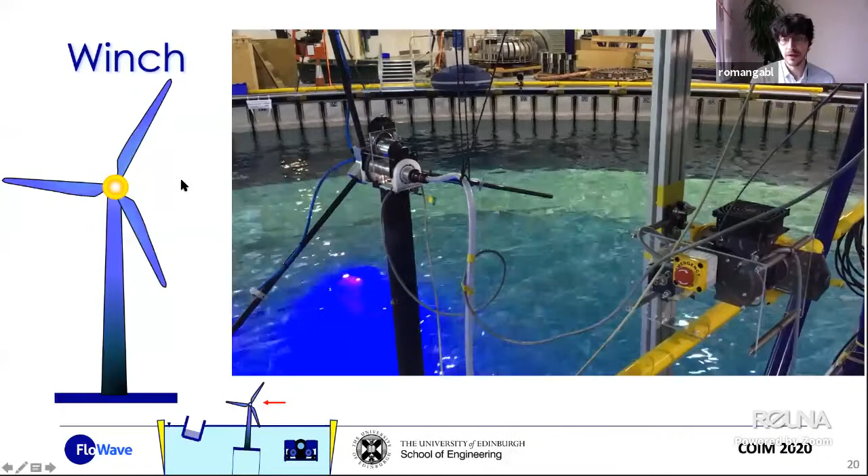Waves coming in. That's for us still the perfect condition, or the ideal condition, that you have this central force coming in there. And the more a little bit crazy one is the jets.

So we have a high pressure pump in the tank down there, which pumps up water into this flexible pipe. This is put into the shaft and distributed to each individual jet on the side of the model blade, and it pushes out the water on the side. You see the water here, this water splashing.

It's quite interesting to see this, and we had a lot of calculations before. Do we need a tarpaulin? Do we need something in front of it? Luckily, we didn't need anything special because we have such a nice big tank, so it was fine for us.

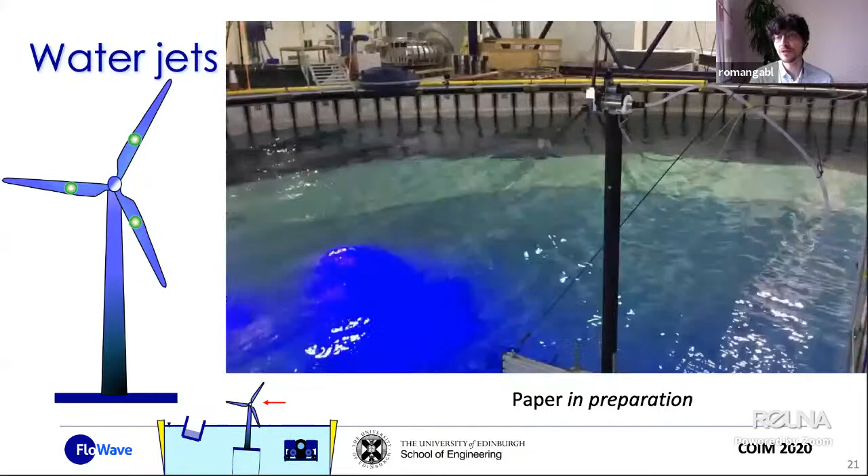As stressed before, this setup is quite in an early stage of how we do it, but it works, and the paper is currently in preparation to publish the results. And I don't want to show you any further about this, and want to jump into the last topic of my presentation,

and give you a little bit of an insight into things which we do in our testing campaign with the ROV. So ROVs are quite common, and they're getting more and more used, especially in offshore maintenance. It is quite critical to have them. And Orca Hub is a big research framework, which joins together a lot of different researchers to bring up quite a nice opportunity to do some work. And they also provided us with the Blue Robotics ROV. So this is a commercial one which we tested here.

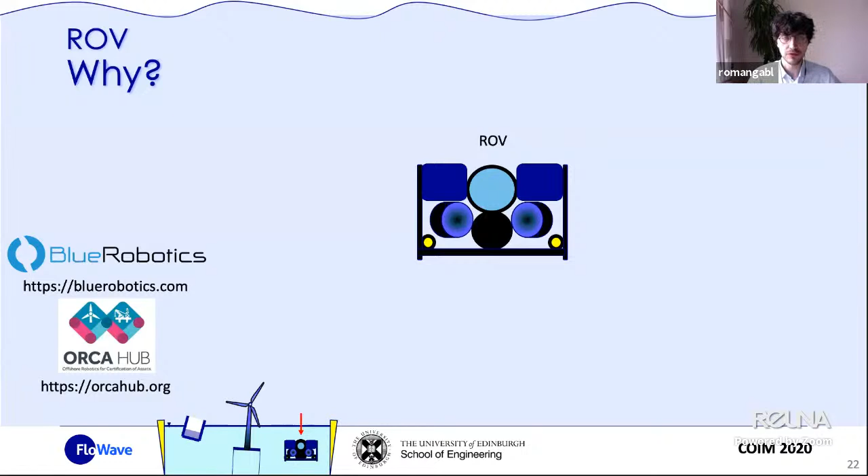Again, I don't want to say a lot about the ROV, because first it's a commercial one, but our colleagues at the University of Edinburgh who are doing this project completely changed the brain of the ROV and the algorithm in the back, and made it completely new. And so the novelty is inside the brain of the ROV. But for their algorithms, they needed to have hydrodynamic forces.

How does the ROV react to wave and current? That's very important for station keeping algorithms, which are critical to do work in high current, challenging conditions in the sea, and also to have data for validation experiments. Again, all the three mentioned examples, the cylinder, the floating wind, and also the ROV are always validation. So we want to compare numerical data with our experimental approach.

And in this case a main aspect for us, which is not always covered by the manufacturer, is the shadowing effects of objects in front of it. So classically, the ROV approaches a pipeline and it comes closer into the flow shadow, and then the complete flow conditions change for it. So we are looking at the forces acting on the ROV based on waves coming from the top and from all sides with the current.

And the first approach when they came to us: normally you do a towing tank. So you stick your ROV onto a carriage, drag it through the water, and measure the forces, which is quite common and very well used, especially for boats and ships. So there is nothing new in it, but it's challenging to have the shadowing effect. And we were asked, could we do something a little bit more sophisticated, because we don't have a flume, we have this big circular tank.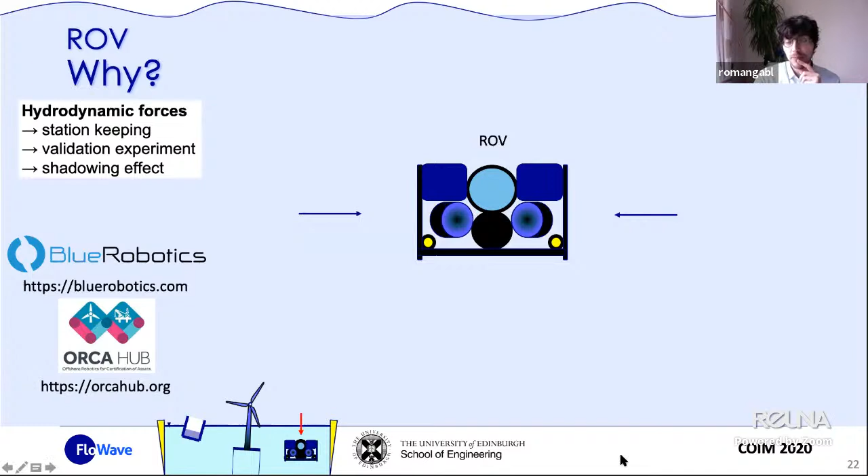And we came up with an idea: why don't we hold this ROV just by tethers and a support structure in the middle of FloWave, in the middle of the depth in the tank center, and we have the possibility to run waves and current from all sides and have a really good impacting flow onto it. Plus, obviously, to measure the forces which act on the ROV, we needed load cells. Only 4 load cells are shown, but in total you need 8 load cells to measure all the forces.

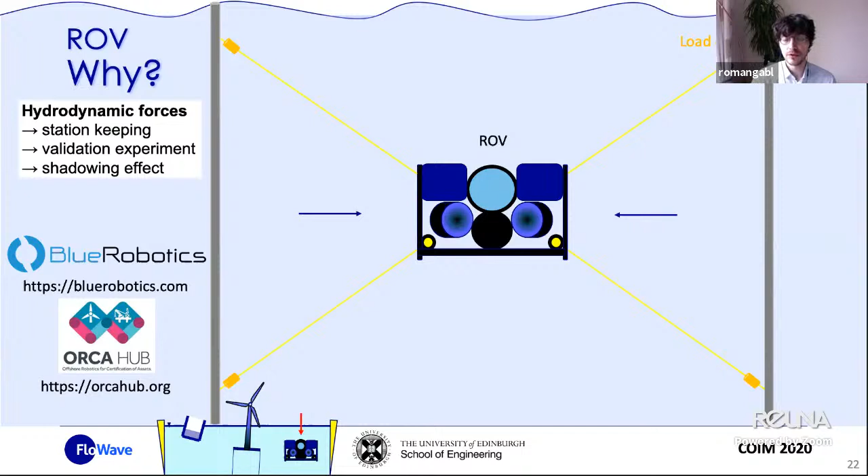And by having two opposing tethers, you can have a pre-tension which you can remove afterwards. And you now have the chance to bring obstacles in front of it and to directly see and measure the comparison. When the ROV comes closer to a big pipeline, how does the ROV react or feel this change, whether it's closer or further away.

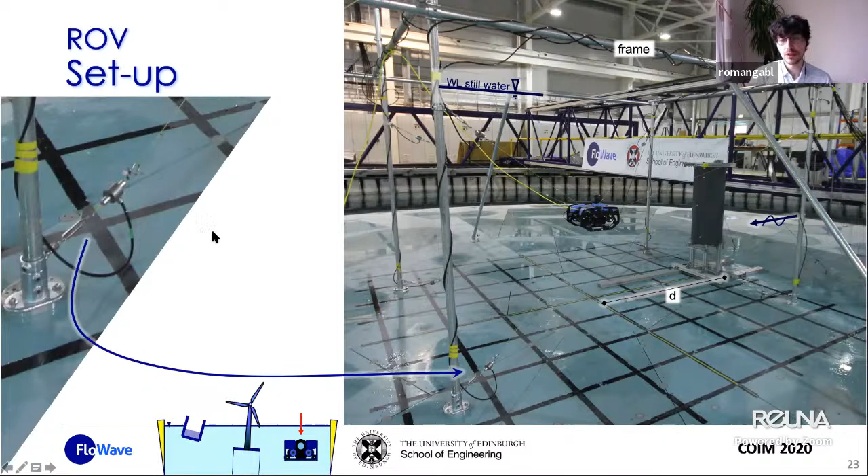Just to have a detail of these load cells, they're quite standard ones for us. They were used here, 100 Newton load cells, as a good range of load cells. And in each load cell in the front, there were again 8 load cells around here, was also a marker. And these markers, some are here blue underlined, they are captured by the underwater Qualisys system.

So previously, Tom mentioned it, the Qualisys system, the above-water Qualisys system. The above-water Qualisys system works with infrared light. So you have markers that reflect the infrared light back, but obviously underwater you can't use infrared light. You use just simple normal blue light, and these cameras send out the blue light, and this blue light is reflected by the markers and goes back.

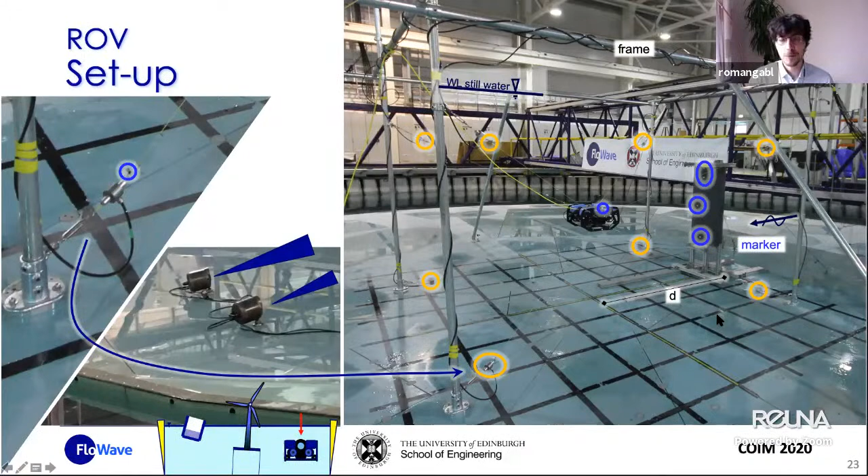And we have at each load cell a marker and a lot of markers on the ROV, not only one. We had 8 markers on the ROV, and in addition we had some markers on the cylinder to see where it is, hopefully that it's stable. And yes, it was absolutely stable in the construction hold, but when you have something sticking out, it can be challenging with a higher flow speed.

Okay, testing. We tested the ROV in the tank going down. Now here you see the model sink, the floor pulled down. We tested 3 different distances: 0.9, 1.3, and 1.7 meter distance. The difference between each one is 0.4. That's the diameter of the cylinder which was chosen, so it's just a representative one, and 0.9 is quite close. This is one of the further ones.

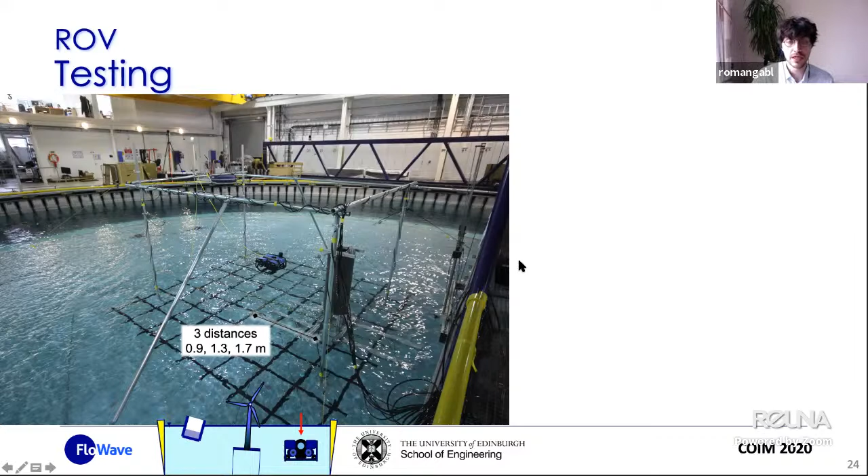You see that all the cables are going into the frame and up to the gantry, and also the ROV has a steering cable which is mounted onto the frame, so it's not floating around. It's quite consistent, so we always have the same influence of this cable in there. This is one when the system is running. I will show you a video in a second.

From the top view, the ROV is quite in there in the center, and that's really the advantage of this system. You have the ROV in the center. Obviously, you have a little bit of a wake, which is caused by the support structure. But keep in mind that we tried to bring it as far out as possible so that the center core where the ROV is is not influenced, and we could get really good results and good measurements.

What did we do? Tom mentioned it before. We have the chance to run all directions, 360 degrees of wave and current. In this case, we limited ourselves to the main direction, so coming from the front, which is the main case, also with the obstacles in front of it, and ran velocities from 0.2 to 1 meter per second, and from the side and also from the back.

So we have a little bit of a validation of the results, and the ROV is not fully symmetrical. So just based on the geometry, there is a difference between these different directions. Waves only ran from the front with current, regular and irregular ones. So this was just a little bit of a peek into it, but the main thing was the current.

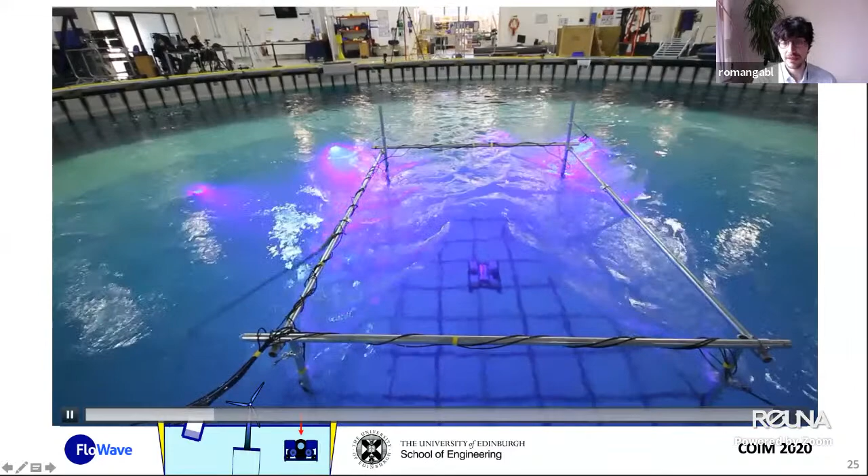As Tom mentioned before, current in videos normally looks really not very dramatic, but in reality, 1 meter per second is quite fast. So there is a lot going on. What you can see here is the underwater camera system; in this case we only had 4 in there. Now we have 2 more. And these 4 Qualisys cameras measure the motion of the markers on the ROV.

And if there was an obstacle in front of it, they would also measure the motion, hopefully no motion, of the obstacle. In total, everything went well. We had a good testing campaign.

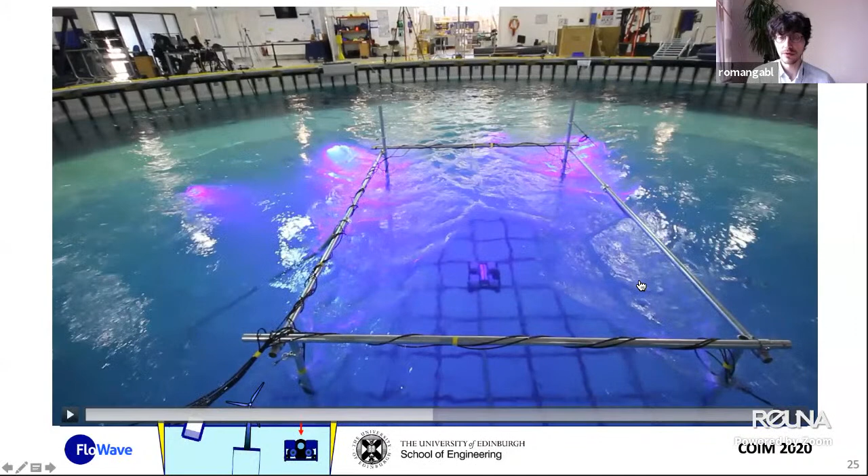The results were really interesting and good. And for this project, it's the ORCA Hub project, we already published the data set. So whenever you are interested in having the data, what the measurement results look like, you can have a go at our DataShare system from the University of Edinburgh. The data is now available.

And what you will find in there is one data set, which is the raw data, which is just the load cells and the motion capturing system of the ROV, the different states. But also in a second, processed data set, you find for each of these mounting points where a tether locks into the ROV the forces Fx, Fy and Fz in the specific tank coordinate system, or the coordinate system the ROV guys wanted to have.

For a civil engineer, where Z goes down is always a little bit suspicious, but that's exactly how they use it commonly. And you can access this and have a look at it and maybe use this for your future work or whenever you're interested in this. Our analysis and the paper connected to the data, how we did the data analysis, is currently under review and hopefully getting out soon, and then you can have a look at it.

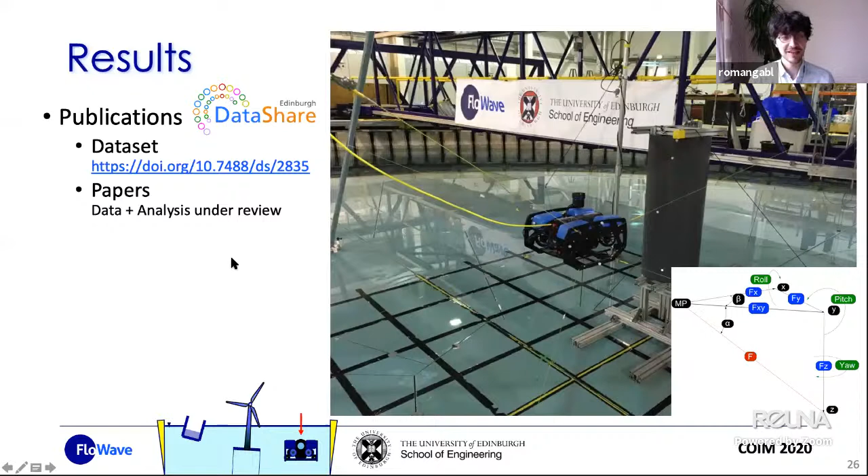So everything which I present is quite close to the presentation here. The next step in this project will be that we go back to the tank and have some further open tank testing. The colleagues have now used the input of the force measurement in their algorithms. They optimized the algorithms, and before the coronavirus lockdown they also had the chance to pre-test everything a little bit, and they had good results. And they go back now, hopefully when the tank opens again, and do some more tests with the current on, because previously they only ran a still water tank.

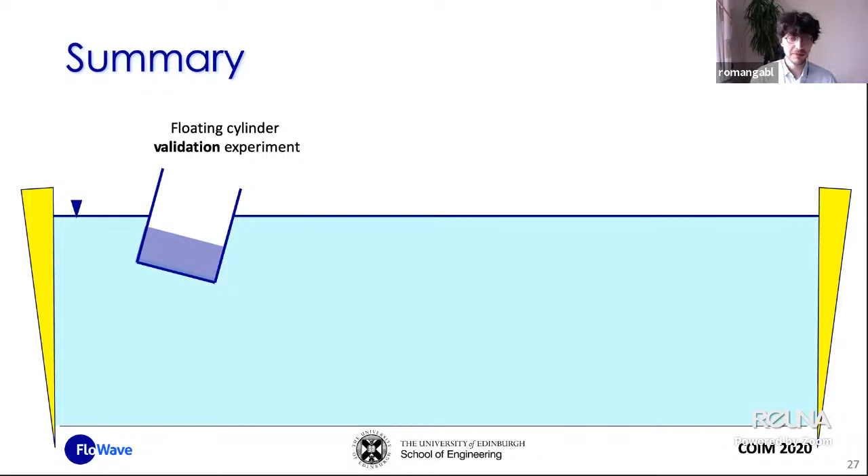So that's me. I just want to give you a quick summary of what I just showed you. Initially, I started with a floating cylinder, which is a validation experiment. That's really basic research. We just want to do something very specific to solve a problem, which hopefully solves another problem in the future of the energy storage system close to the wind turbines. The validation data is available. It shows really big motions, which we wanted to have, and can be useful when you're interested in fluid-structure interaction. The data sets are available, and you can use them for your numerical codes or for your studies.

Then the next step was a little bit more, I don't want to say crazy, more very special. It was the water jets. So we successfully used water jets to generate thrust on each individual blade, which is not something we want to promote as a replacement of a winch, but as an additional tool for very specific investigations, looking into failure or imperfect systems like blade problems, or worst case scenarios which are catastrophic.

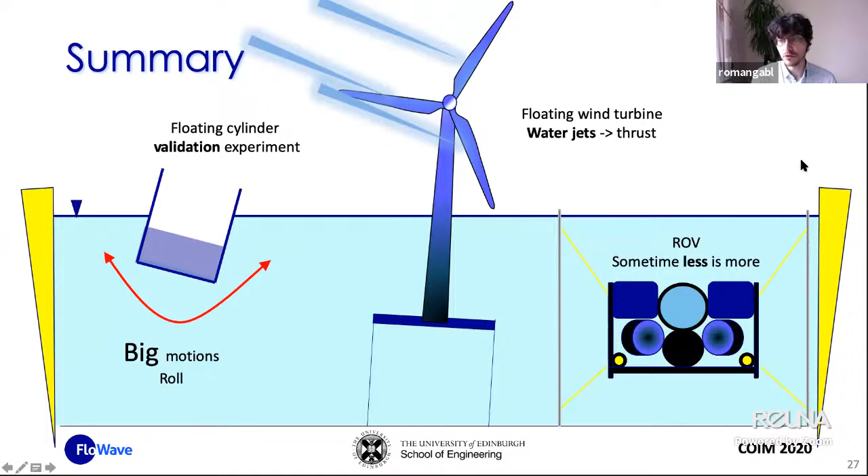And the third one was the ROV. Key sentence: sometimes less is more. We used these very thin tethers, which were really strong and stable, and we could show that we can use a support structure which is far out, not obscuring the flow, and fully use the capability of the FloWave testing tank to have this ROV tested in a really comprehensive way. And again, from top to deep down into the tank, from the above-water Qualisys system to a combination needed because of the water jets, down to the completely submerged system, where we used the underwater Qualisys system very successfully.

Tom mentioned at the beginning, the first picture on his slide was the Slow Mo Guys. I also wanted to mention that, we didn't discuss this before, but it's really cool. If you're interested in the FloWave facility, and not so much the fully research things, then maybe have a go at the Slow Mo Guys. You either find them via this link, or you search for Slow Mo Guys and FloWave, and you find a really fun video which I think close to 50 million people saw, and they did some things which we will definitely never repeat again.

And I will see Tom thinking about this, that he definitely never will do this again. And also I want to mention the second part where you can see Tom speaking about FloWave.

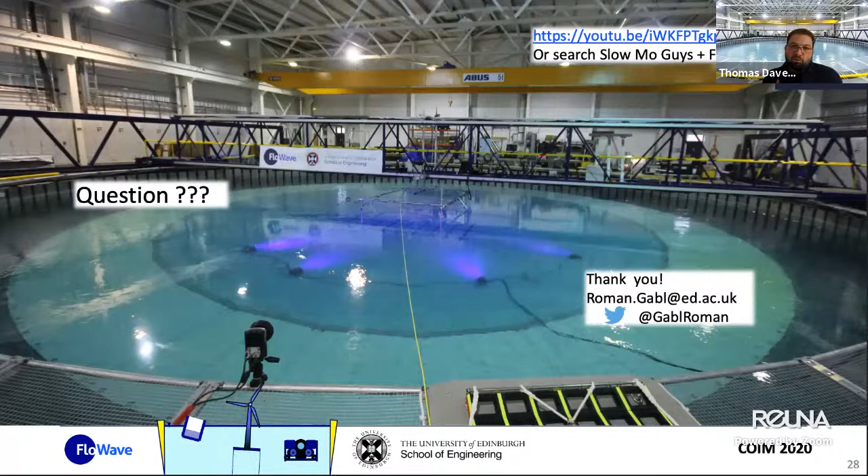For Tom, can you explain how you absorb the waves? Because you have paddles on both sides. Do you do it by actively controlling the paddles, or do you have some other method of absorption? Yes, it's all active absorption, so it's all force controlled. So rather than give a time series of paddle position, rather than asking it to drive to a certain angle, you're asking it to produce a certain force. So there's a force transducer and a closed loop control in the wavemaker itself.

So therefore it can absorb the wave, but also absorb any reflections or radiated waves coming off the model. It becomes quite difficult in a circular tank because you don't want to absorb all the... the best way of describing it is I think the direction is also important. So this is effectively a predictive control that says this is the force you expect. And the force control, the active absorption, is basically absorbing the difference between what you expect to be sensing and what you actually measure.

And it makes the timing across the tank very important. It's quite difficult in a circular tank. That's why there aren't circular tanks, basically. But once you've mastered it, it lets you do all the fancy stuff with directional control and so on. Okay, and how good is the absorption? So, in energy terms, it's around 97%. In height, though, that doesn't quite.

You usually get reflection coefficients below 10%, but it's a little different from a conventional tank because usually your absorption is better at high frequencies and worse at lower frequencies. With active absorption, it's reversed. So we get very good low frequency absorption. So we're very good on energy, but you tend to get more reflections at high frequencies. So if we know we're going to have a lot of high frequency energy, we can also put foam beaches into the tank to absorb some of that. Okay.